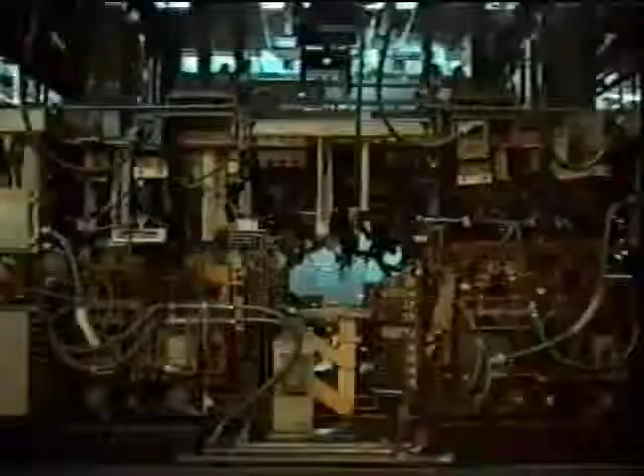It begins with energy. Energy is vital to the growth of our nation's economy. A healthy economy means more jobs and growing income. But even with successful energy conservation, the need for additional energy in America and throughout the world is increasing.

In the next few minutes, we're going to tell you about something important to you, me, and our entire nation in the decades to come. It's about an energy program known as the Advanced Liquid Metal Reactor Actinide Recycle System.

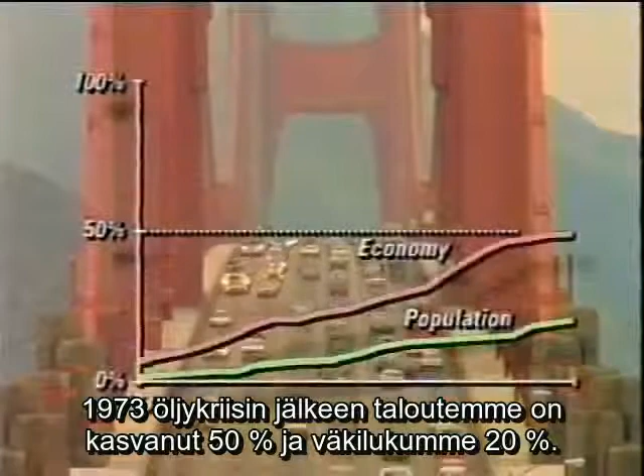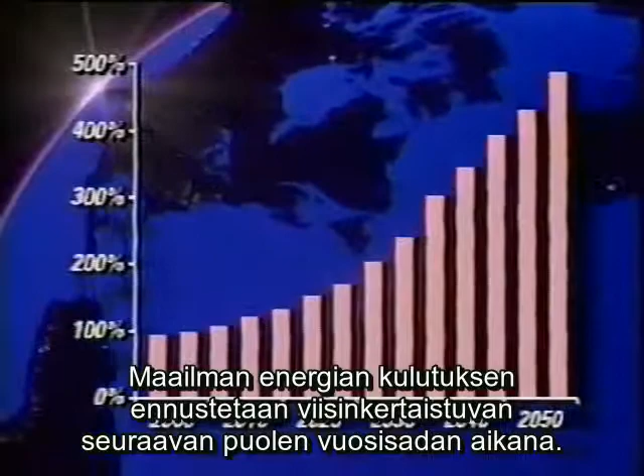Since the oil crisis of 1973, our economy has grown by 50% and our population has increased by almost 20%. We've built over 20 million more homes and we operate 65 million more vehicles. Long-term projections of worldwide energy consumption show a five-fold increase in global demand for energy in the next half-century.

The source of energy most widely used in the production of goods and services is electricity. Electricity has become a critical element in the American quality of life. It's closely coupled with population growth, industrial competitiveness, and jobs.

Electricity consumption in America is projected to continue to grow steadily, requiring nearly double the current electric power capacity by the year 2030. To address this need for clean, safe, and economical energy generation and use, Congress passed, and the President signed into law, the National Energy Policy Act of 1992.

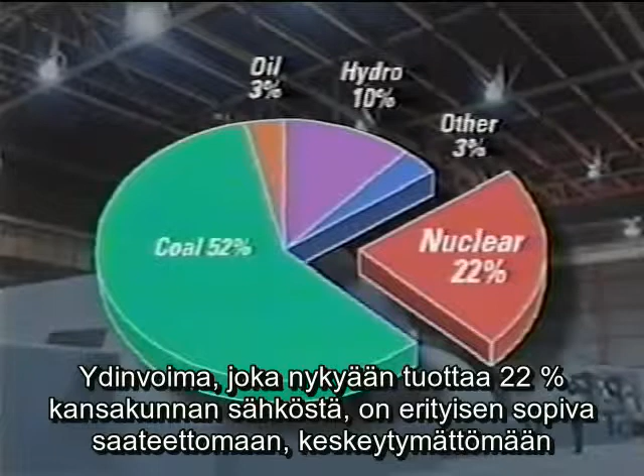Conservation, natural gas, hydropower, clean coal, and renewable energy sources such as solar and wind must all play a role in meeting our energy needs, but each has its own limitations. Nuclear power, which currently generates 22% of the nation's electricity, is particularly suitable for pollution-free, continuous, large-scale electricity generation, and it is recognized as a significant part of our energy mix.

The Energy Policy Act supported the evaluation and development of a wide range of electrical generation options so that the best choices would be available to meet future needs. The Advanced Liquid Metal Reactor Actinide Recycle System, or ALMR, is specified by the Act as one of the nuclear power options important to the country.

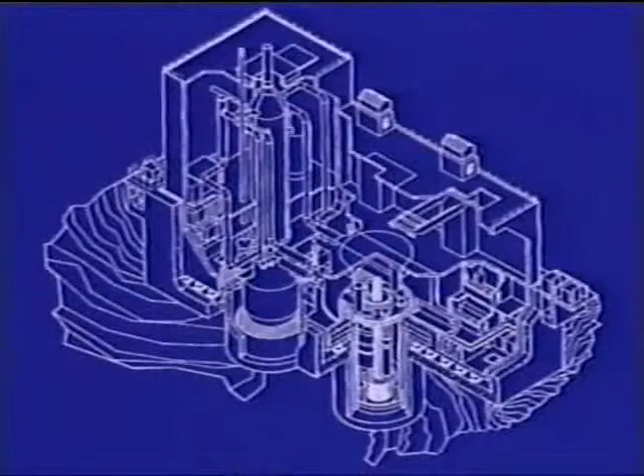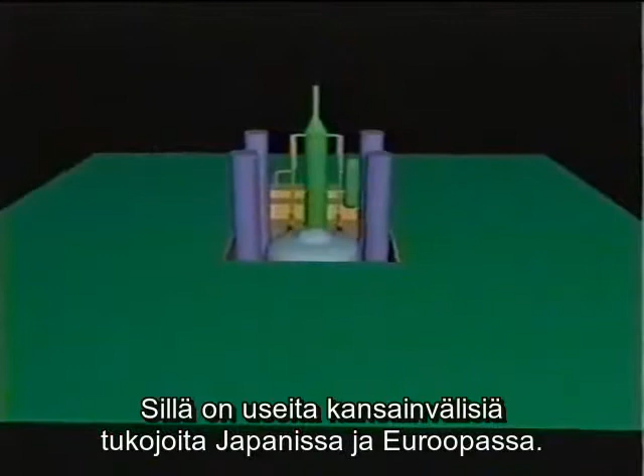So what is the ALMR, and why is it an important option in the energy mix? The ALMR system is an advanced energy option being jointly developed by U.S. industry and the Argonne National Laboratory under U.S. Department of Energy sponsorship, with support of several international participants in Japan and Europe.

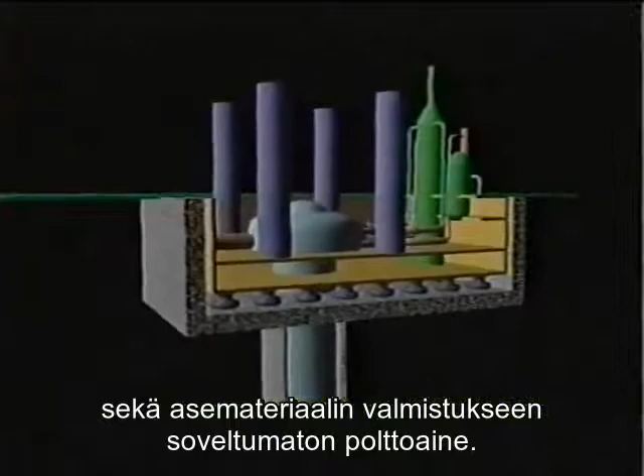It combines a passively safe, modular reactor power plant with proliferation-resistant fuel. The National Energy Policy Act calls for demonstrating the technical and economic feasibility of the ALMR and its fuel cycle by 1996. Based on these results, Congress and the Department of Energy will then decide whether to proceed in partnership with the private sector with prototype construction leading to commercial power production by 2010.

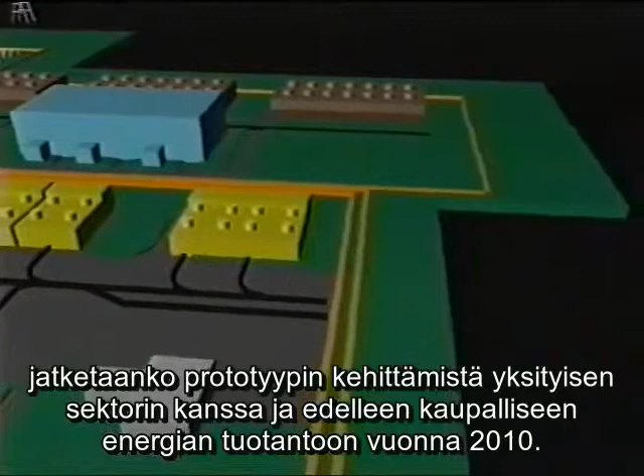The ALMR's adaptability is unique among the major power reactor concepts in that the plant can be designed to burn the long-lived radioactive products from spent light water reactor fuel, to destroy weapons plutonium, or to extend energy resources.

The ALMR system is also responsive to the concerns and needs of the public. It generates energy safely, it is projected to be economically competitive with other domestic energy sources, and it is environmentally clean with no greenhouse gas emissions to the atmosphere and no contribution to acid rain.

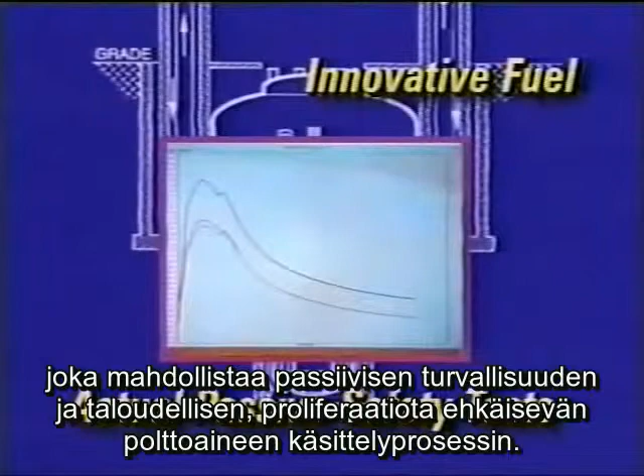Central to accomplishing these objectives is the use of an innovative fuel which enhances passive safety characteristics and is coupled to an economic, proliferation-resistant, and compact fuel cycle. And further, significant improvements in nuclear waste management appear feasible.

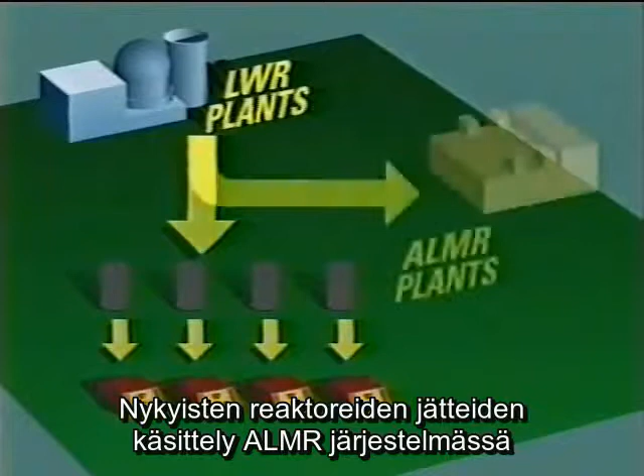The recycling in the ALMR of the long-lived waste products from current reactors would reduce the number of waste repositories by a factor of at least 4.

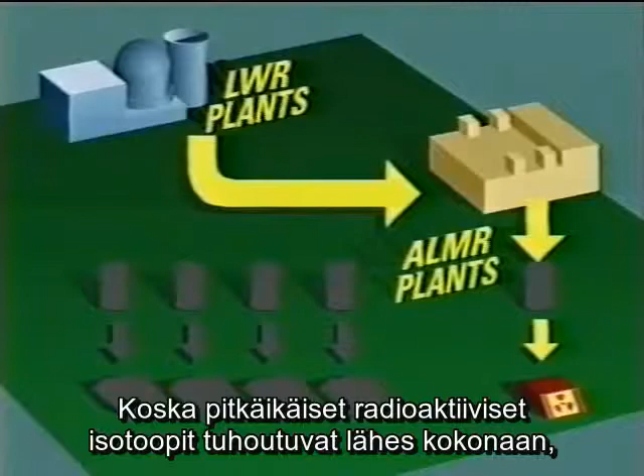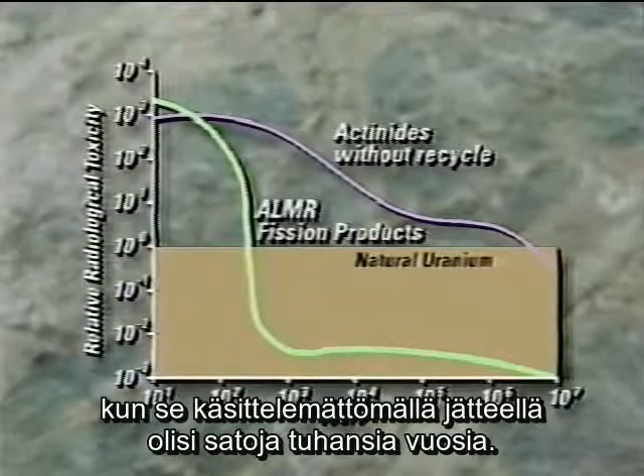Since the long-lived actinide elements would be almost completely destroyed, the toxicity hazard of the waste would drop to the level of natural uranium in just a few hundred years, compared to hundreds of thousands of years for the unrecycled spent fuel. The recycle system would pay for itself by generating electricity.

Evaluations show the ALMR to be cost competitive with current electricity generating sources. In simplified terms, the ALMR could be considered as a non-polluting incinerator which converts toxic waste to energy. The design concept is like this.

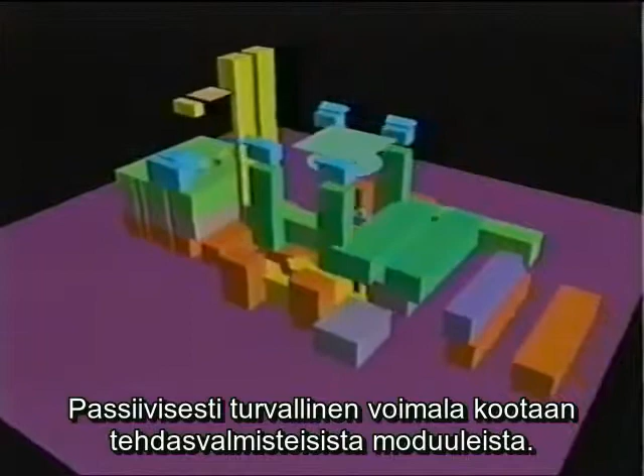The passively safe reactor power plant design uses factory-fabricated reactor modules as its basic building block. 6 reactor modules are arranged in 3 identical 600 megawatt power blocks, generating 1,800 megawatts of electricity. Smaller plant sizes of 600 or 1,200 megawatts can be built by using only 1 or 2 of the standard power blocks.

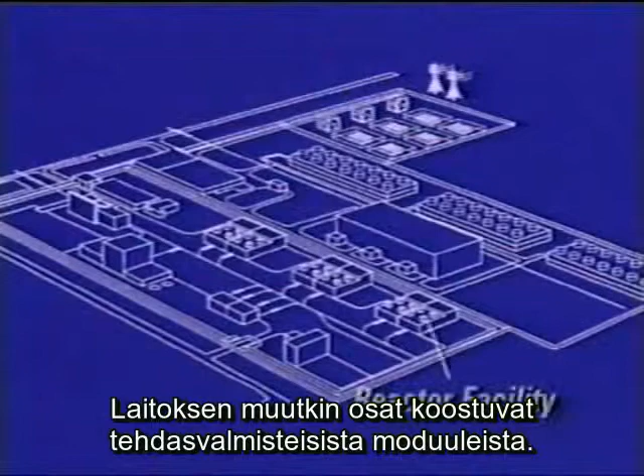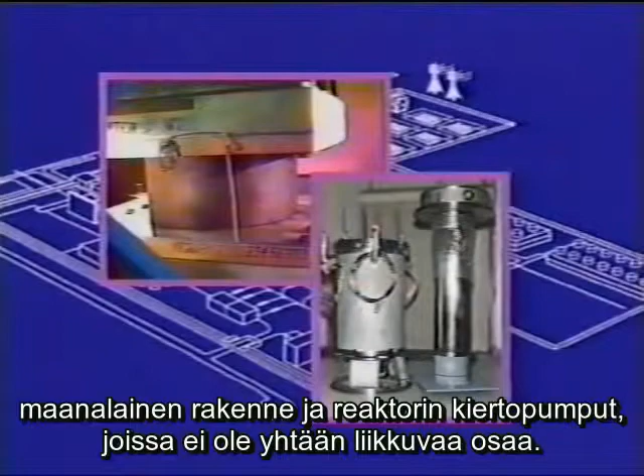The plant components are also modularized and factory fabricated. As a result of this innovative factory fabrication, the construction time, economics, and quality control are improved. The design includes many other innovative features such as seismic isolation, underground construction, and reactor pumps with no moving parts, and builds on many years of successful and safe liquid metal reactor operations in the United States.

An important milestone of the ALMR program was the completion of a review of the basic design and safety performance by the Nuclear Regulatory Commission. In January 1994, the NRC issued a pre-application safety evaluation report which concluded that no objections or impediments to licensing the ALMR design have been identified.

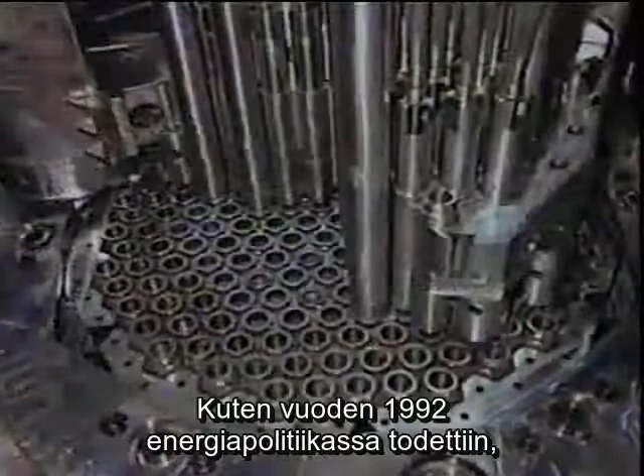As recognized by the National Energy Policy Act of 1992, the unique and significant potential of the ALMR system in meeting future energy needs merits further testing and design. The National Research Council Committee, sponsored by the National Academy of Sciences, also concluded that the LMR should have highest priority for long-term nuclear technology development.

Utilities and the technical community recognize the significant potential of the ALMR to reduce the need for additional nuclear waste repositories, and the experts agree that the ALMR program will help, not hinder, efforts to control proliferation.

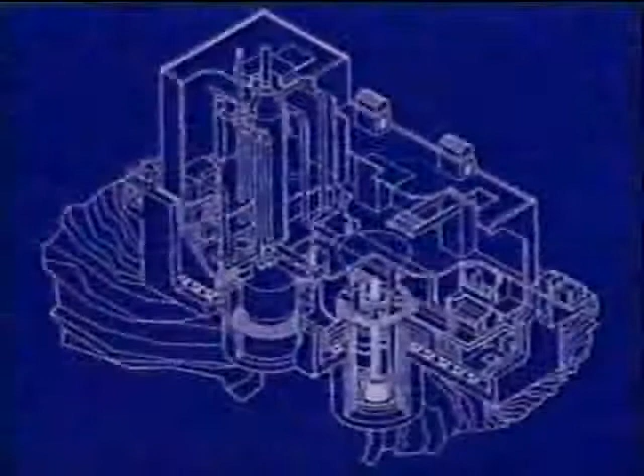The next step is the completion of the preliminary design of the ALMR in combination with the fuel cycle demonstration by 1996, providing important input that will help us to formulate and implement a solid national energy policy. Continuing the funding of this project will make this possible.

The advanced liquid metal reactor is an important energy option to carry into the 21st century.